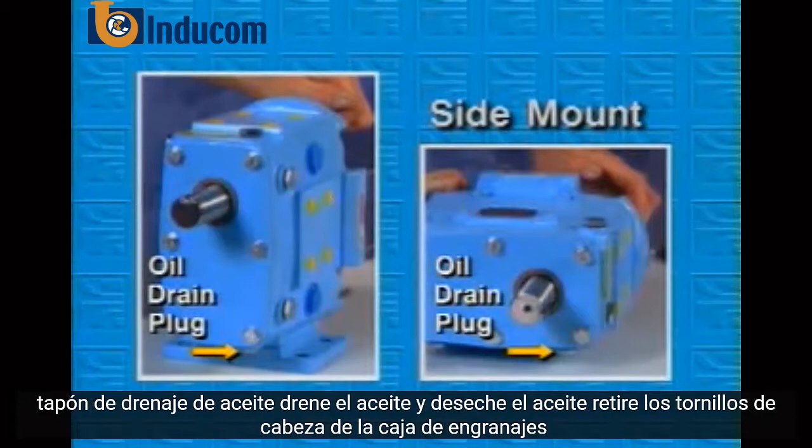The second portion of this video presentation will show the proper disassembly and reassembly procedures for the Gearcase components. Remove the oil drain plug, drain oil, and discard the oil. Remove cap screws from the Gearcase cover, then remove the cover. If the cover sticks, use a soft hammer to loosen it.

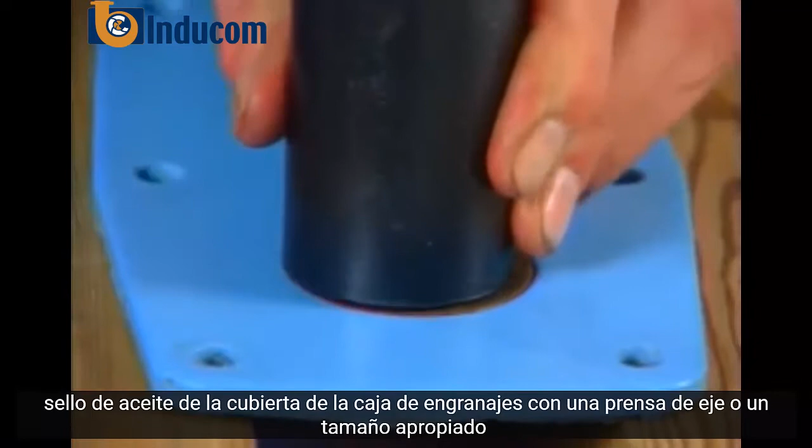Scrape the silicone sealant from the Gearcase and Gearcase cover. Remove the oil seal from the Gearcase cover with an arbor press or an appropriately sized tube and discard. Straighten the locking tabs on the lock washers. Prevent the shafts from turning by wedging a dowel or hardwood block in the rotors.

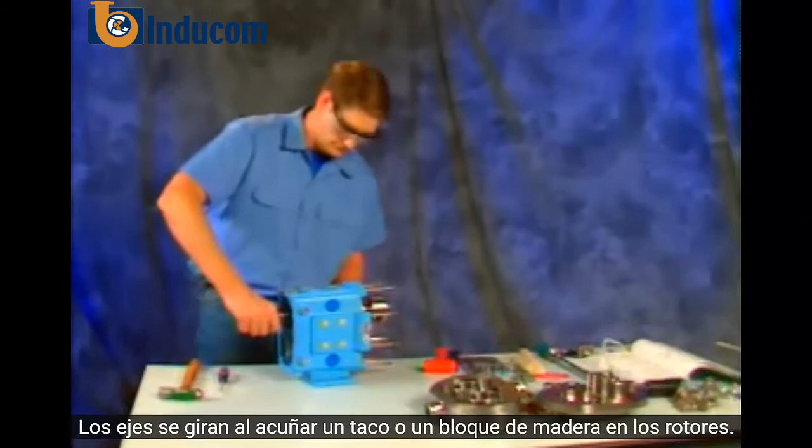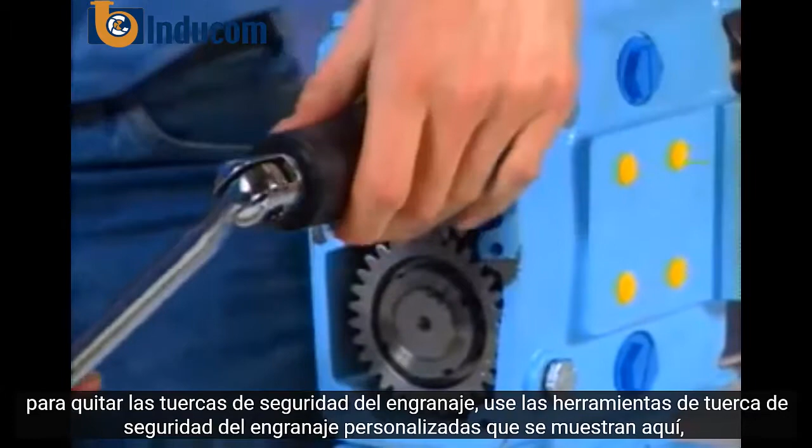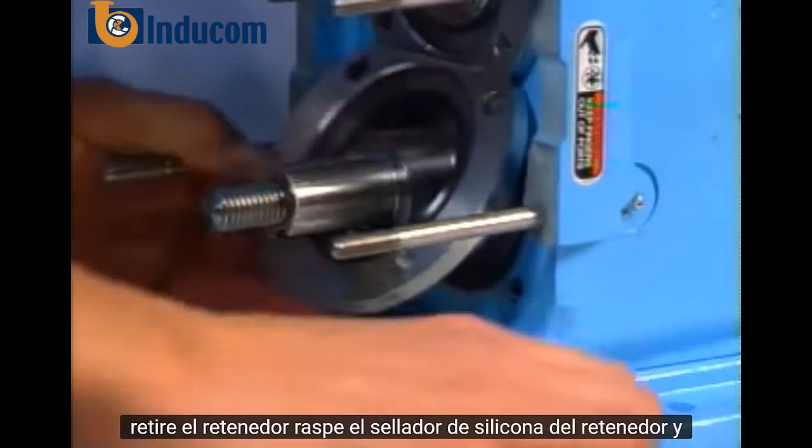To remove gear lock nuts, use the custom gear lock nut tool shown here, which is available through your distributor. You can also use a spanner wrench or drift. Gears will be removed later. Remove the front bearing retainer cap screws and pull off the retainer. Scrape the silicone sealant from the retainer and Gearcase.

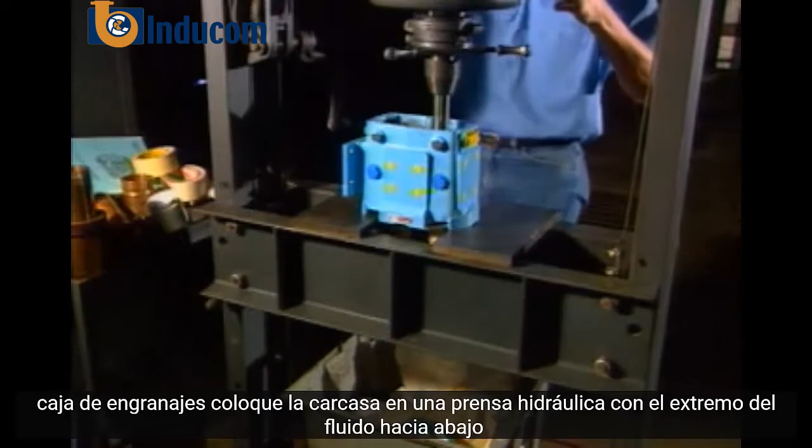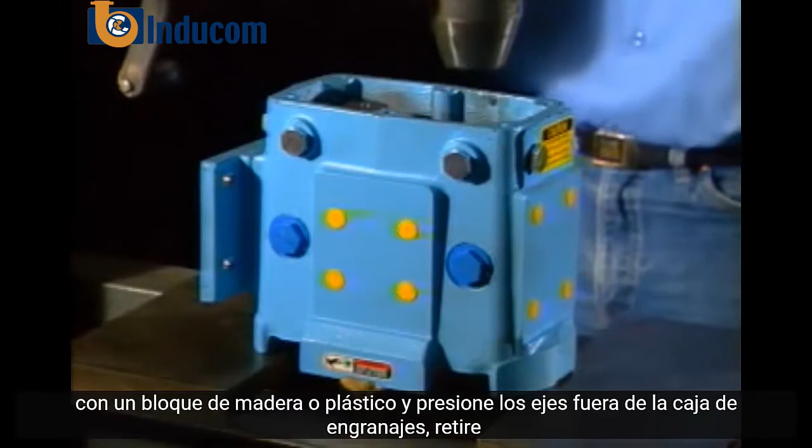Place the housing in a hydraulic press with the fluid end down. See Table 4 in the maintenance manual for tons required. Protect the shaft ends with a wood or plastic block and press the shafts out of the Gearcase. Remove the gear spacer and gear keys. Now remove the timing gears. Then press out and discard the grease seals from the bearing retainers.

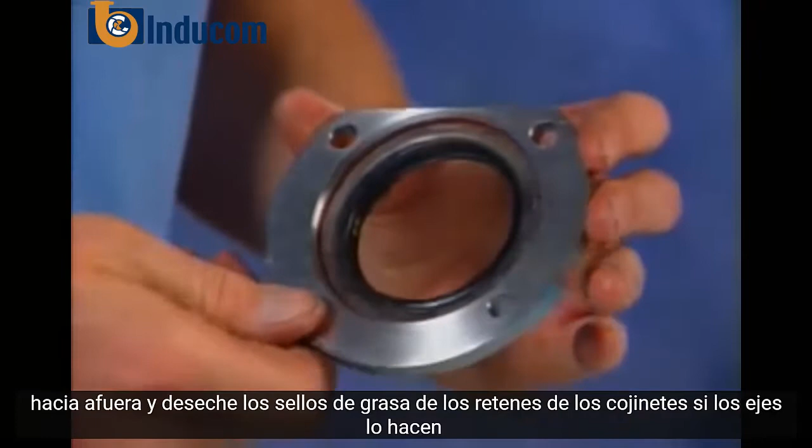If the shafts do not need to be replaced, label the shim stock according to the shaft it came from. Use drive shaft or short shaft on your label. This will eliminate recalculation of shim requirement. Press out and discard both of the rear oil seals in the Gearcase.

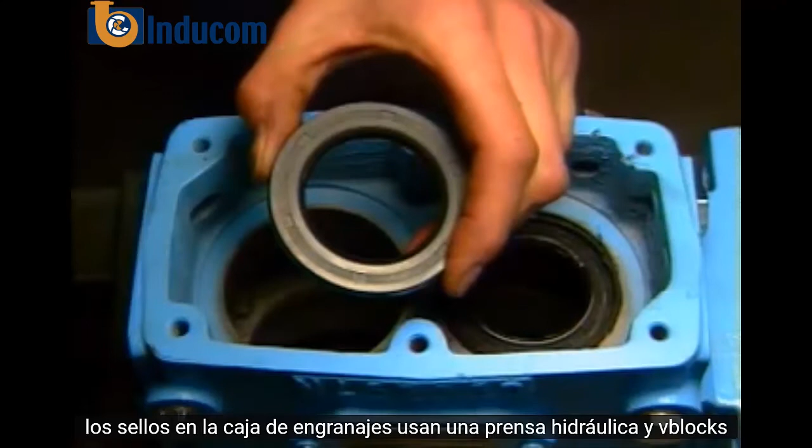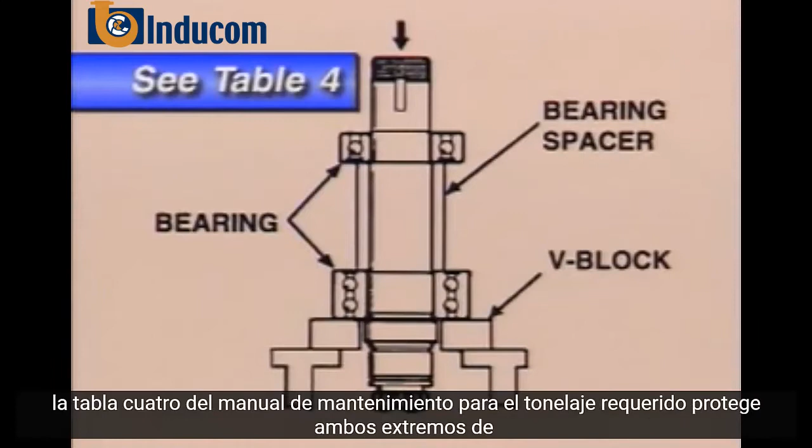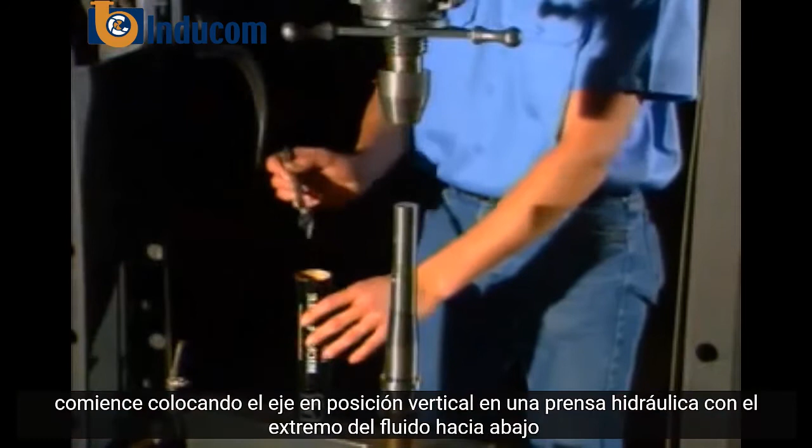Use a hydraulic press and V-blocks to remove the front and rear bearings and bearing spacers from the shafts. See Table 4 in the maintenance manual for tonnage required. Protect both ends of the shafts from damage. The procedure for assembling the front bearings is identical for both shafts. Begin by placing the shaft upright in a hydraulic press with the fluid end down. Coat the front bearing area of the shaft with Micro-Plate No. 555 grease.

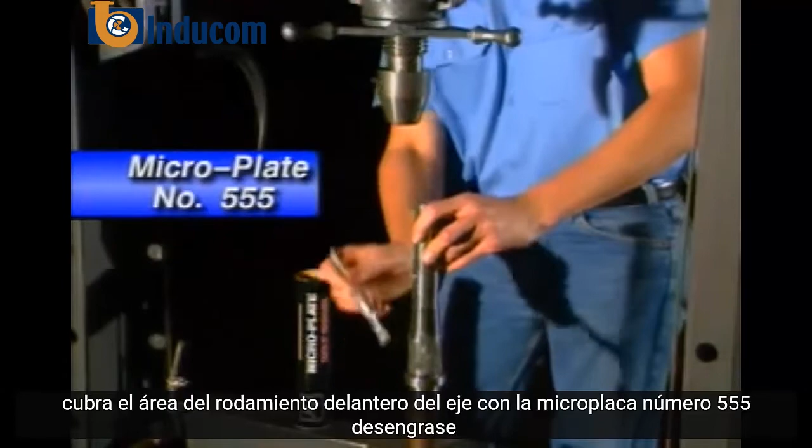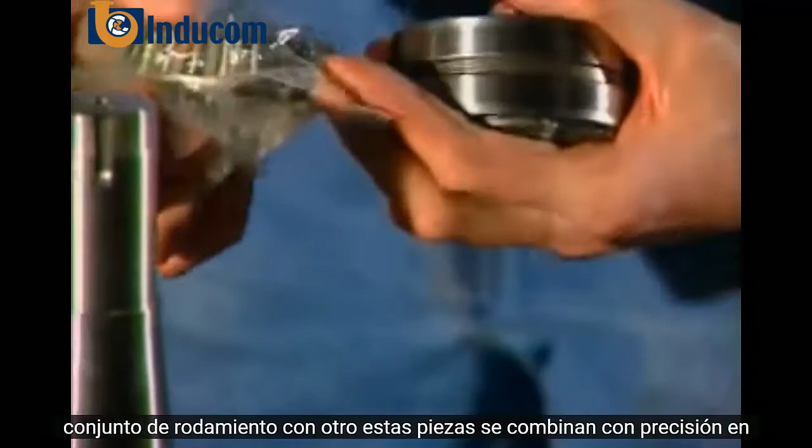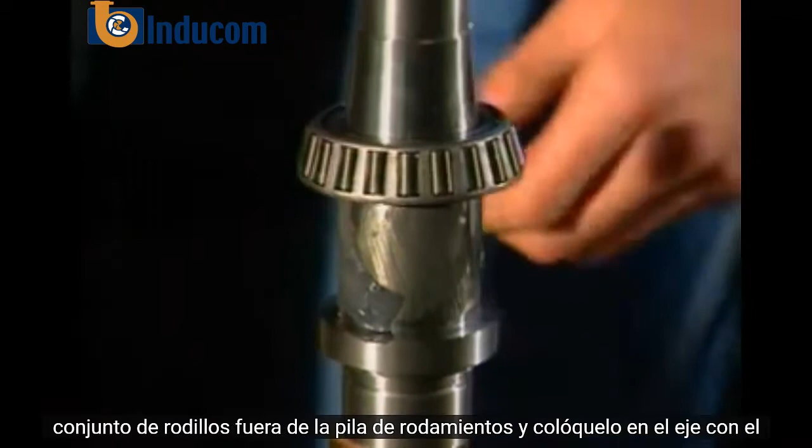Unwrap the front bearing assemblies. Take care not to interchange the parts of one bearing assembly with another. These parts are precisely matched in manufacture and must be installed as matched assemblies. Lift the cone and roller assembly out of the bearing stack and place it on the shaft with the radius down. In all cases, when pressing bearings onto the shaft, press only on the inner diameter or bearing race.

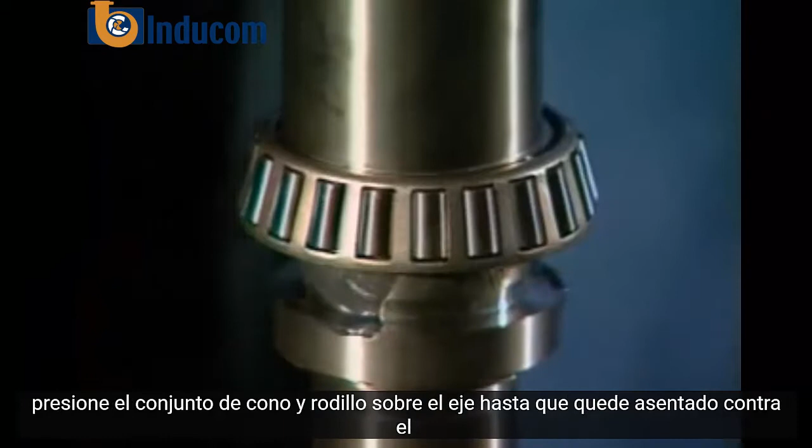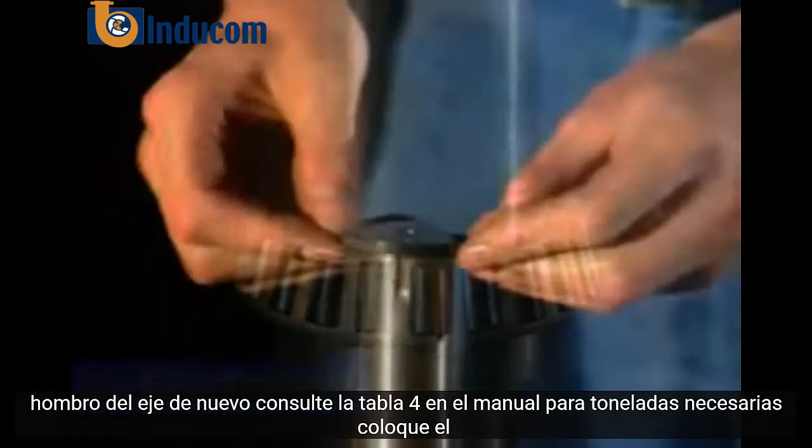Make sure you have the proper size driving tube. You may need several sizes for the different bearings. Press the cone and roller assembly onto the shaft until it is seated against the shaft shoulder. Again, refer to Table 4 in the manual for tons required. Place the front inner bearing spacer over the shaft onto the bearing cone.

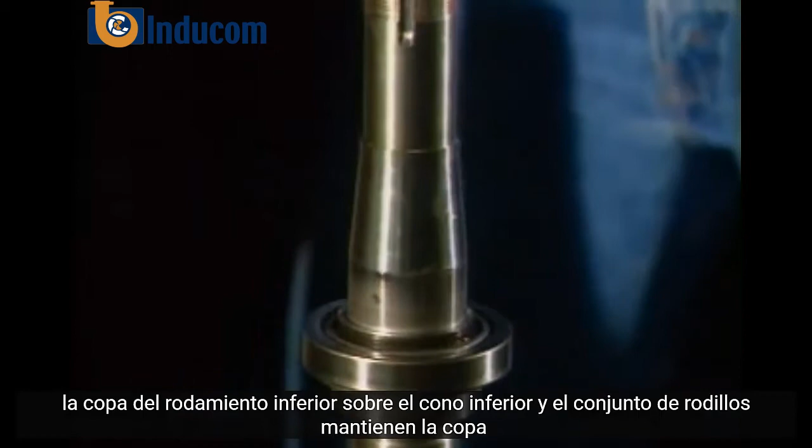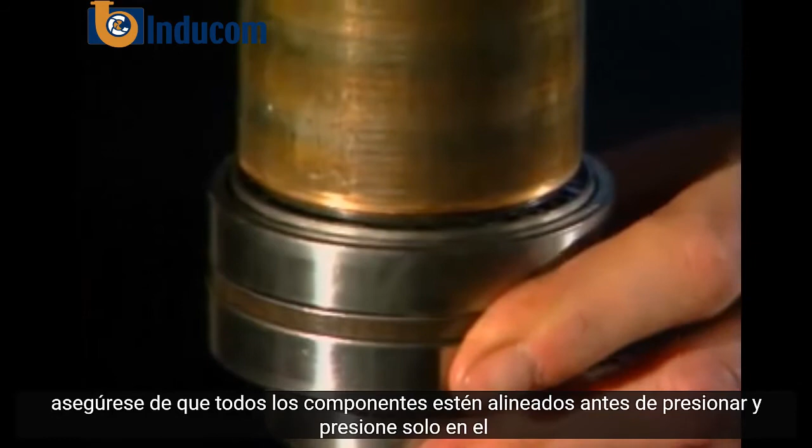Press onto the shaft and into the cup to complete assembly of the front bearing. Make sure all components are aligned before you press, and press only on the inner cone assembly. We've just assembled a 6-piece front bearing assembly. Some pump models utilize a 4-piece front bearing assembly, such as this. Install the bearing spacer.

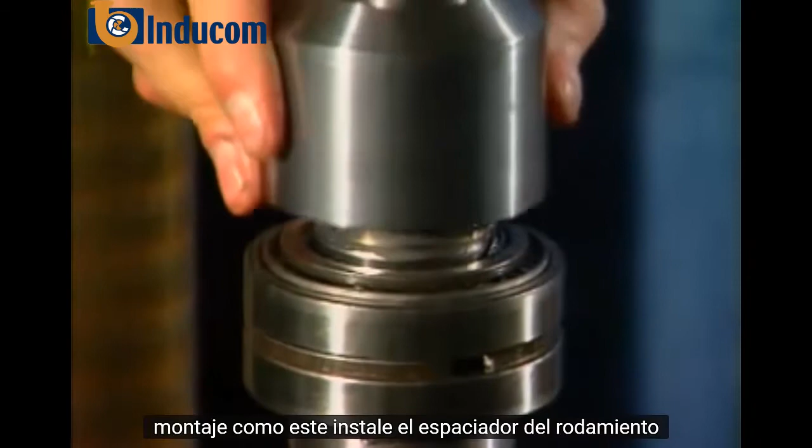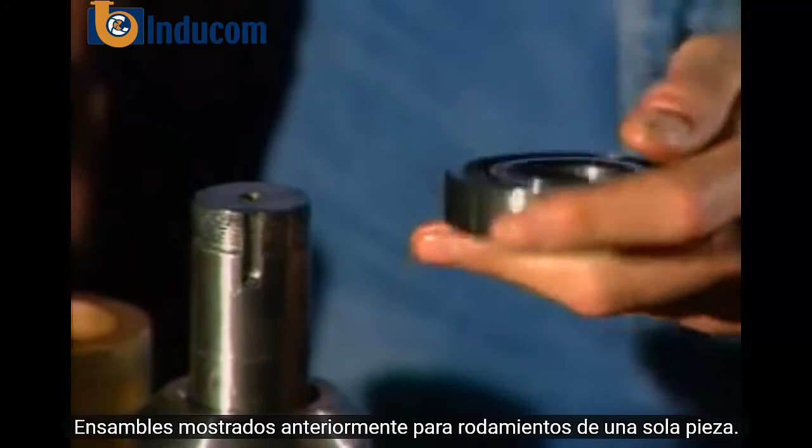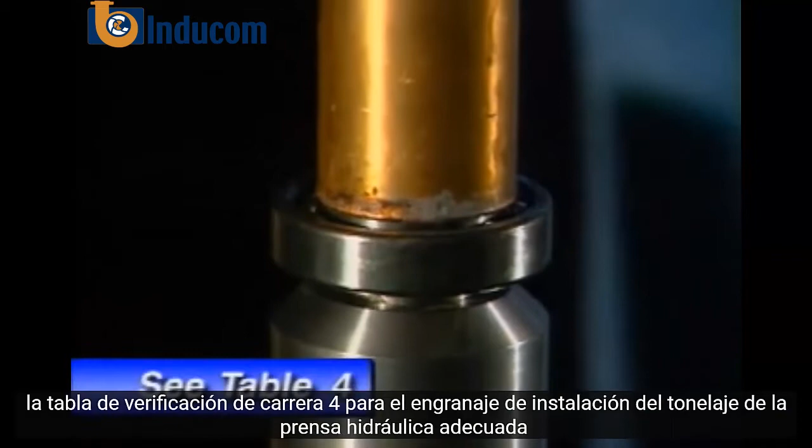Unwrap the rear bearing assembly. Some larger pump models have a multi-component tapered roller bearing assembly, similar to the front bearing assembly shown earlier. For single-piece bearings, the shielded side fits against the bearing spacer. Again, always press on the inner diameter or bearing race. Check Table 4 for the proper hydraulic press tonnage.

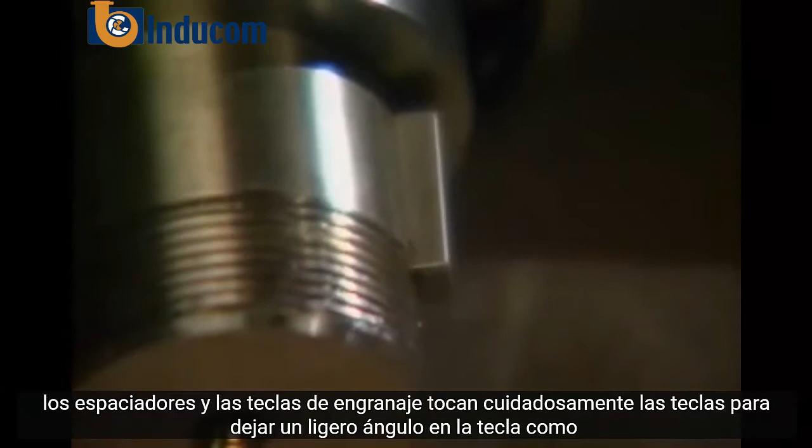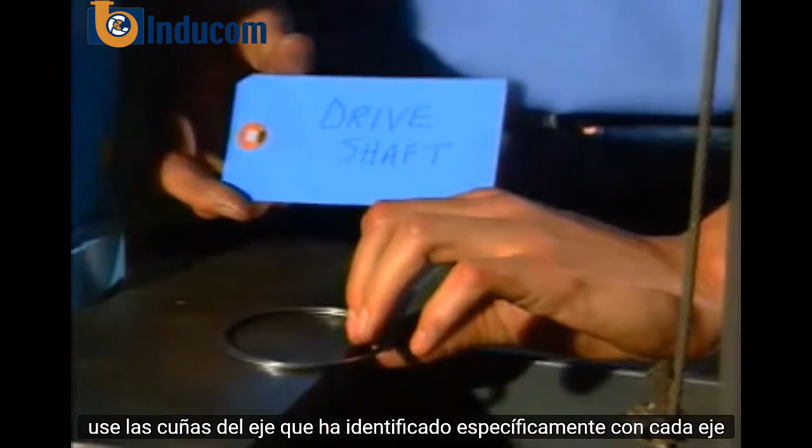Install gear spacers and gear keys. Carefully tap keys in. Leave a slight angle on the key, as shown, to aid in assembling the gear onto the shaft. The next step involves shimming, which, when done properly, assures the correct front face and back face clearances for trouble-free operation. Of course, if the shafts did not need to be replaced, the shims don't either. Use the shaft shims that you have identified specifically with each shaft. Just remember, same shafts, same shims.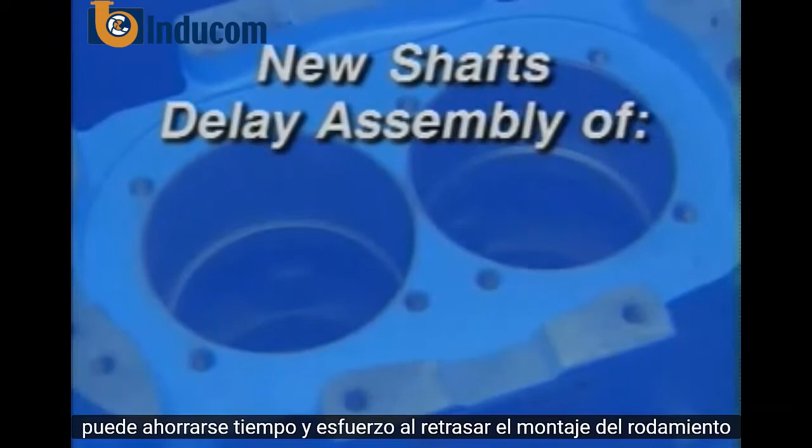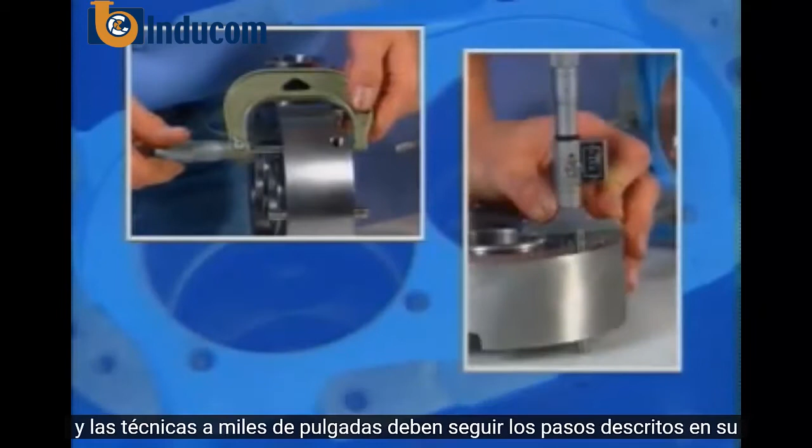If you're installing replacement shafts, you can save yourself time and effort by delaying the assembly of bearing retainers, gears, and lock nuts until you have verified correct shimming. You may need to remove shafts once to adjust shimming before you achieve the proper clearances. Those of you who are comfortable with precise measuring tools and techniques to thousandths of an inch should follow the steps outlined in your maintenance manual under shims, all models.

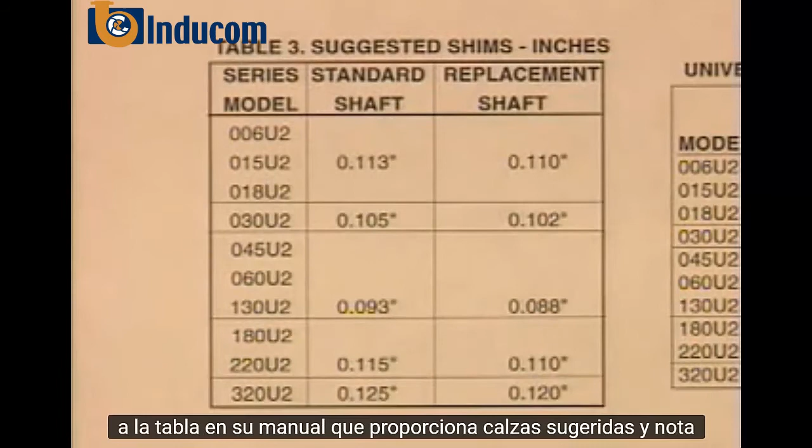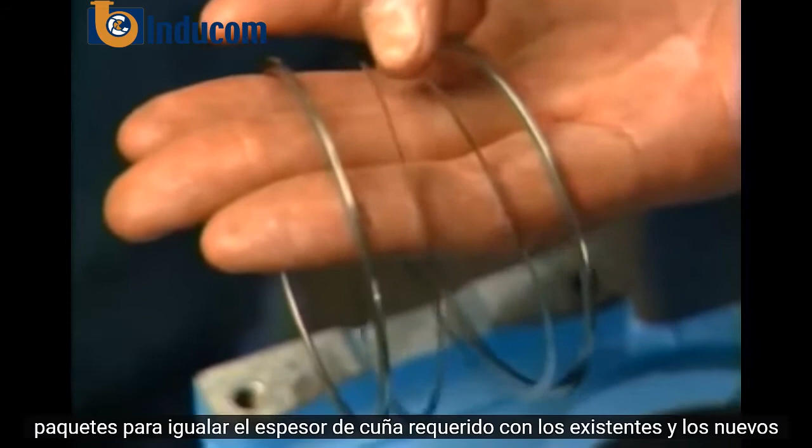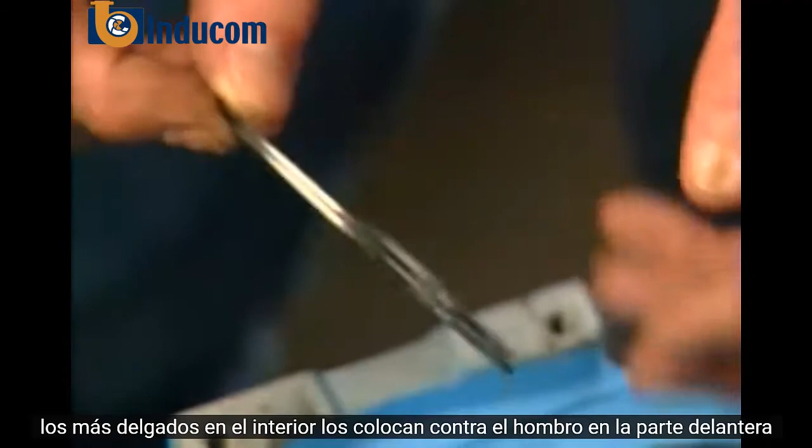For a more hands-on method, refer to the table in your manual that provides suggested shims, inches, and note the replacement shaft shim requirements for your pump model. Use standard shim packs to equal the required shim thickness. With both existing and new shim packs, arrange the shims so that the thicker ones are on the outside and the thinner ones on the inside. Place them against the shoulder in the front bearing bore.

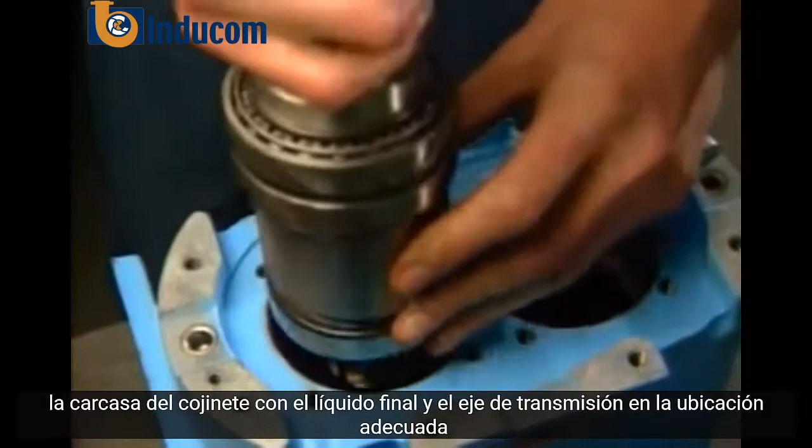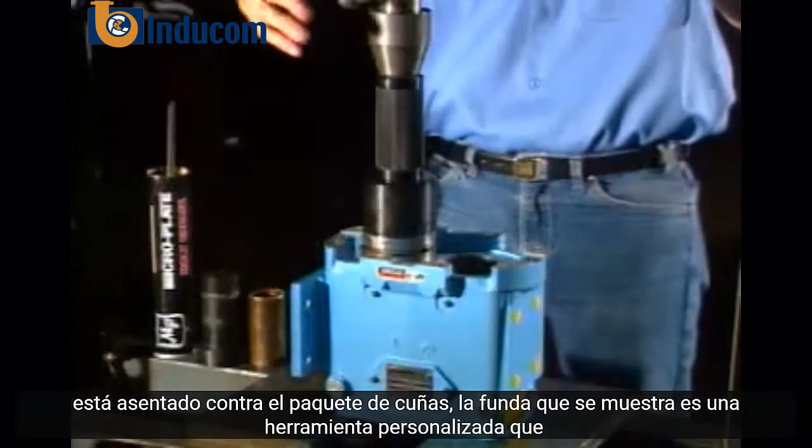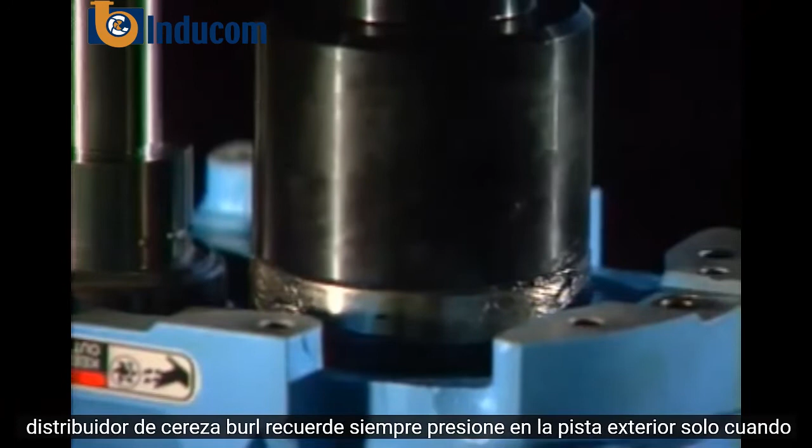With the proper shims in place, install the shaft assemblies in the bearing housing with the fluid end up and the drive shaft in proper location, top or bottom drive as required. Press the shaft into the housing until it's seated against the shim pack. The sleeve shown is a custom tool that presses against the outer race. You can obtain this tool from your Waukesha Cherry-Burrell distributor. Remember, always press on the outer race only when pressing a shaft and bearing assembly into the gear case.

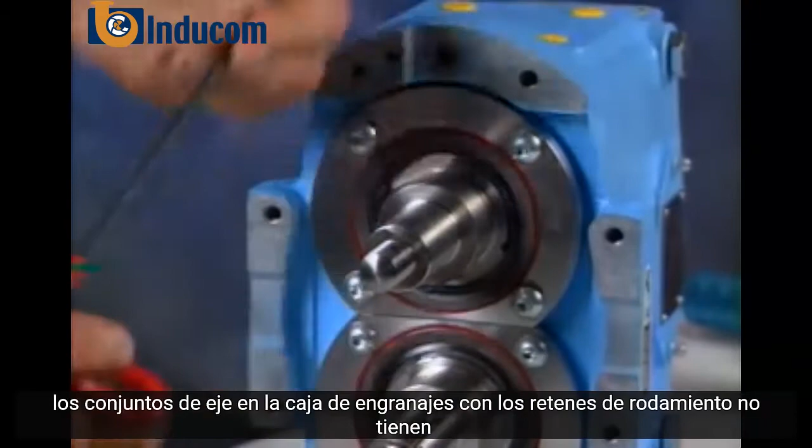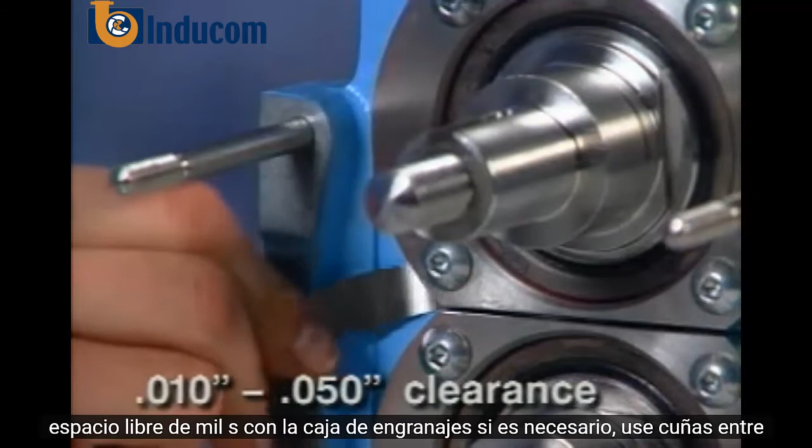Temporarily secure the shaft assemblies in the gear case with the bearing retainers. Add no silicone sealant at this time because we're just checking clearances. The retainer must seat firmly against the bearing and leave 10 thousandths to 50 thousandths clearance with the gear case. If necessary, use shims between the bearing and retainer.

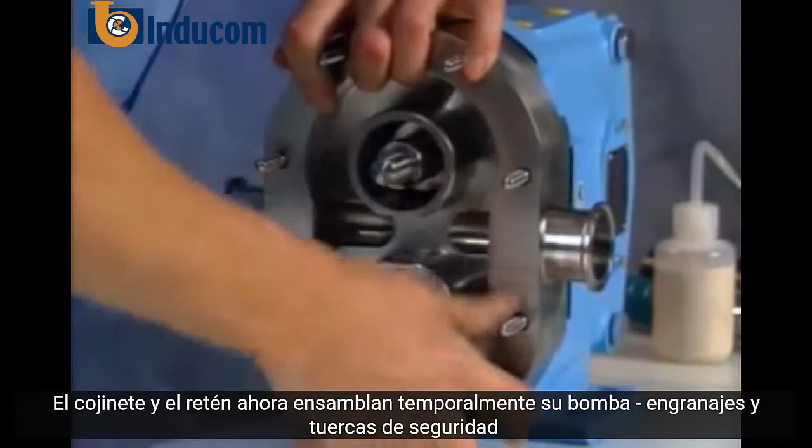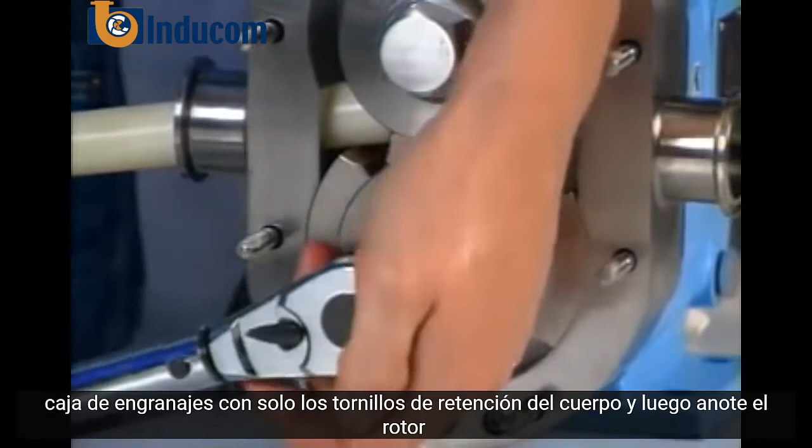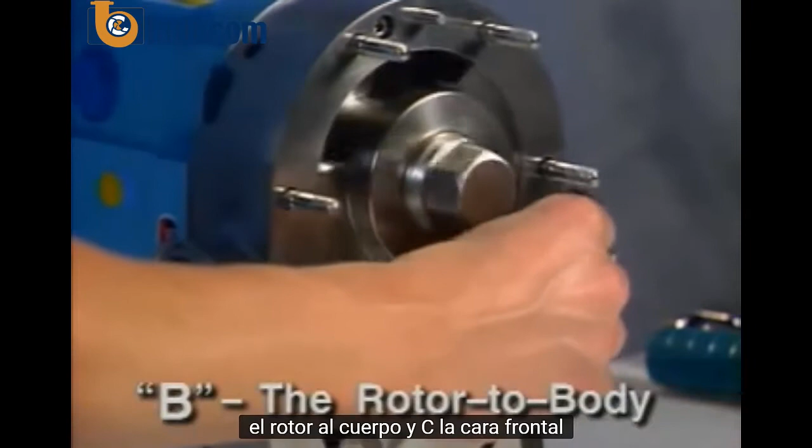Now, temporarily assemble your pump, minus gears and lock nuts. You can do this with the fluid end up or by securing the body tightly against the gear case with just the body retaining screws. Then, write down the rotor clearances for A, the back face, which can be measured from the front or the port. B, the rotor to body. And C, the front face.

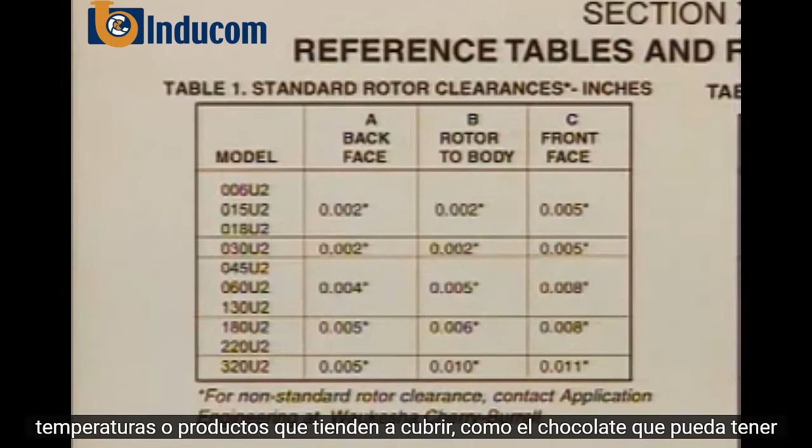Check these clearances against those listed for your pump model in Table 1 in your manual, Standard Rotor Clearances. If your pump application involves high temperatures or products that tend to coat, such as chocolate, you may have special clearance rotors. Contact the factory for proper B and C clearances.

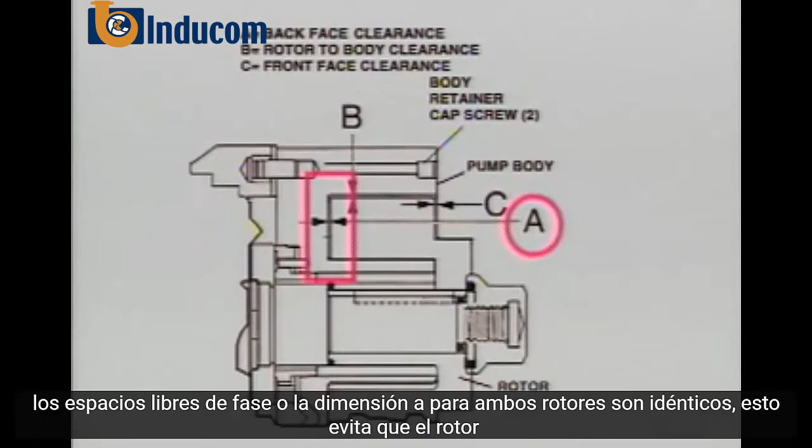You may not achieve the listed clearances the first time. Disassemble and adjust shim thickness to meet these back face clearances. Be sure your back face clearances, or dimension A, for both rotors are identical. This prevents rotor crossover contact.

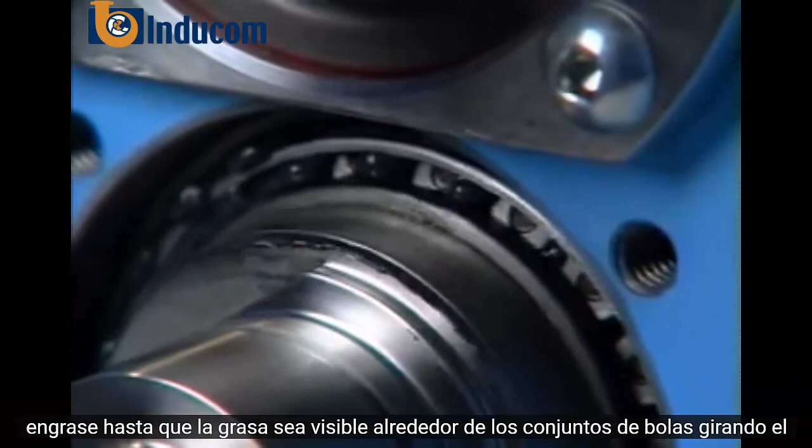After you've removed the fluid end from the gear case, remove the bearing retainers. Grease the front and rear bearings through the grease fittings until grease is visible around the ball assemblies. Rotating the shafts while you grease helps disperse the grease properly. Hand packing grease into the bearings also is acceptable.

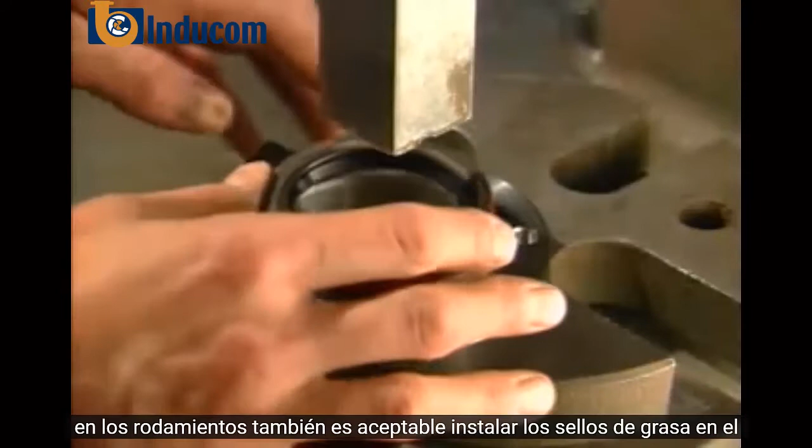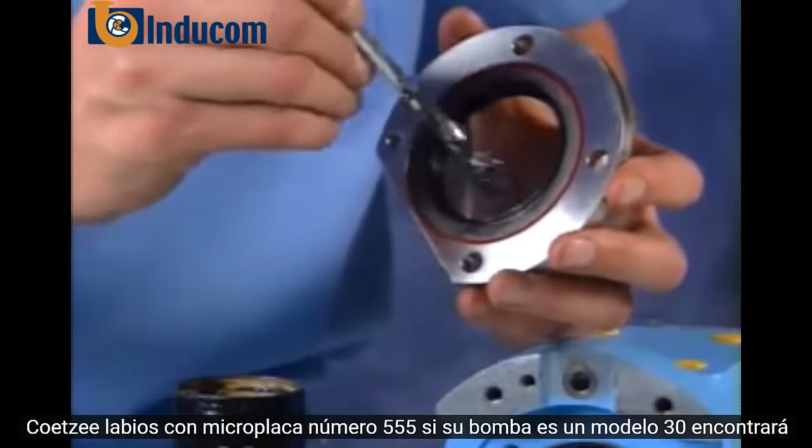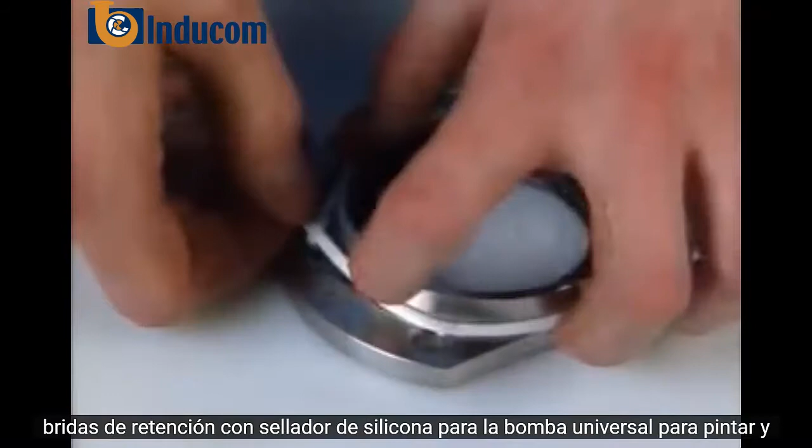Install the grease seals into the bearing retainers with the lip facing out. Coat seal lips with Microplate number 555. If your pump is a Model 30, you'll find the grease seal has to be pressed slightly farther. Coat the bearing retainer flanges with silicone sealant. For the Universal 2 paint pump and other silicone-free pumps, use Gore-Tex sealant. Then install the bearing retainers.

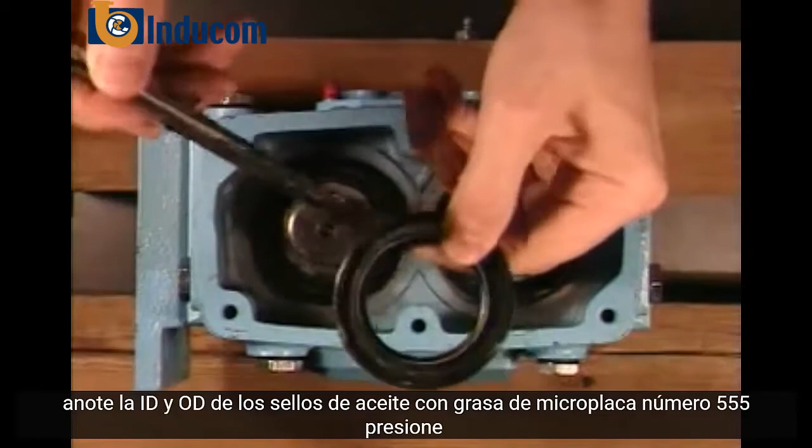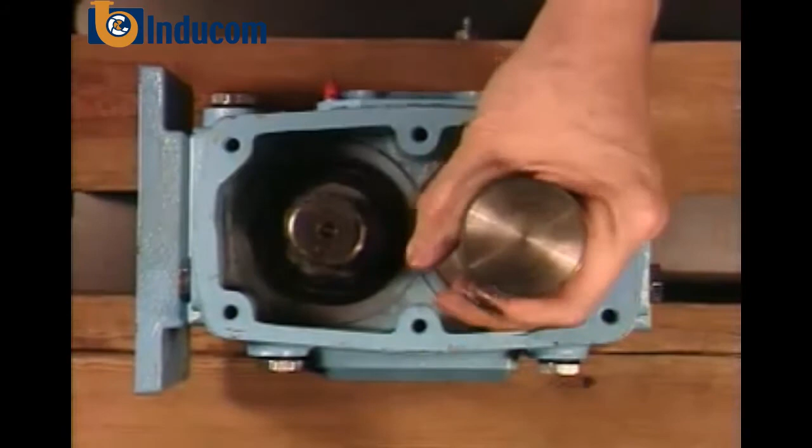Coat the ID and OD of the oil seals with Microplate grease number 555. Press in the oil seals with spring facing out. Before installing the timing gears, identify the gear with the single punch mark. It will be the drive gear. Now check the one with the 2 punch marks. When installed, the 2 punch marks will straddle the single mark.

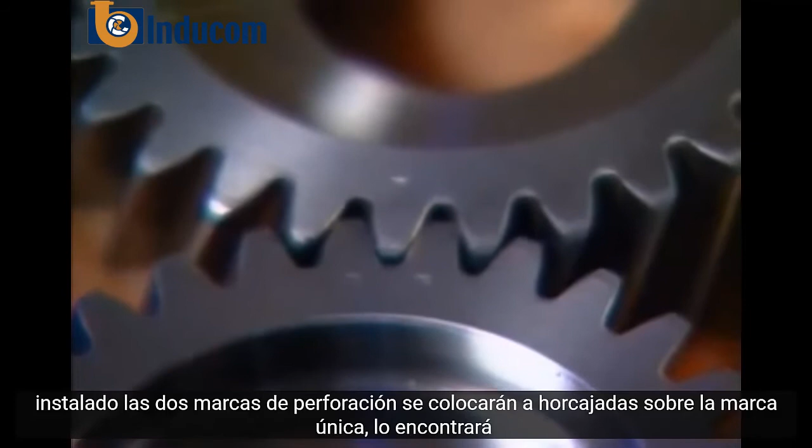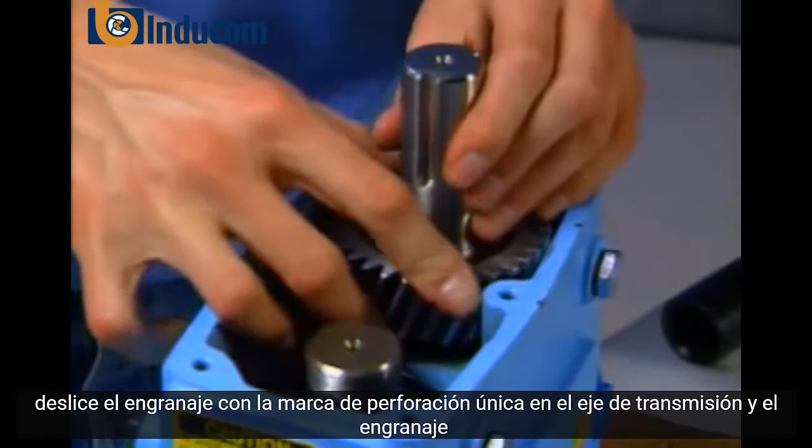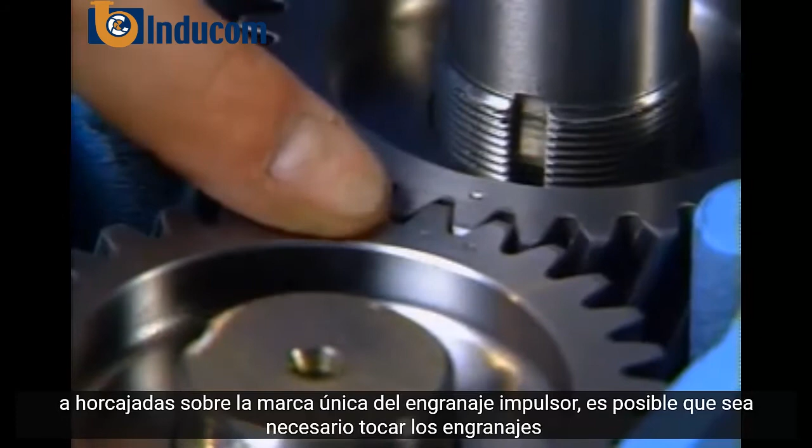You'll find it helps to put the rotors at right angles before aligning the timing marks. Then, slide the gear with the single punch mark onto the drive shaft and the gear with 2 punch marks onto the short shaft, again with the 2 punch marks straddling the single mark of the drive gear. The gears may need to be tapped into position. Slip on the lock washers and apply Microplate grease to the threaded area on the shafts and to the face of the lock nuts.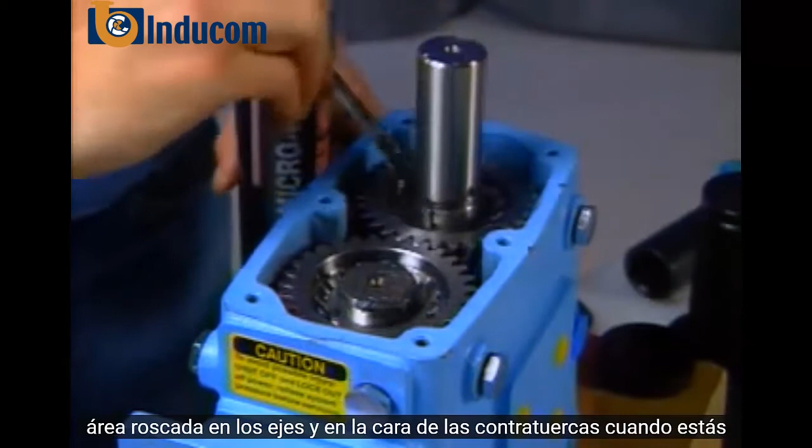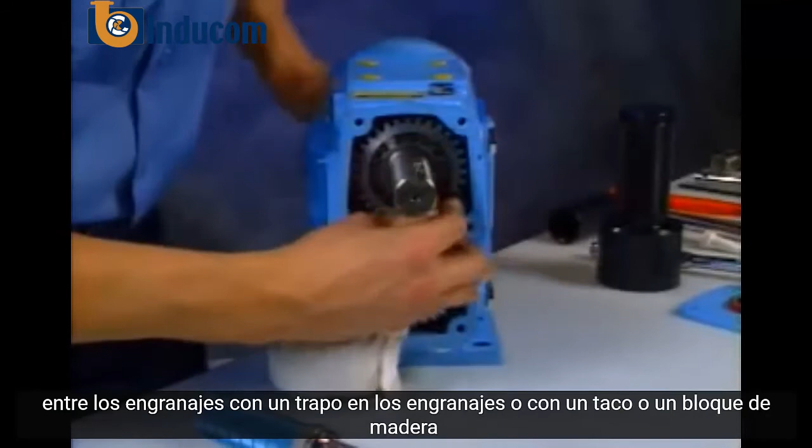When you're removing or torquing the lock nuts, you need to prevent the shaft from rotating, and here are 3 useful ways of doing it. With a wood or nylon block wedged between the gears, with a rag in the gears, or with a dowel or hardwood block in the rotors.

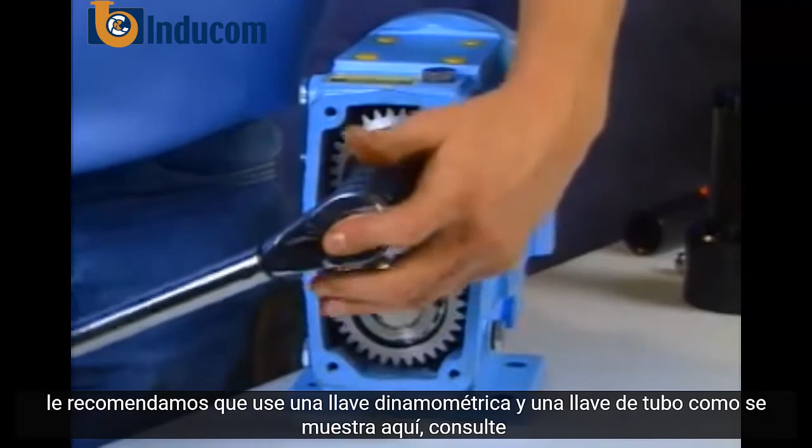You can tighten the lock nuts with a spanner, wrench, or drift, but we recommend you use a torque wrench and socket spanner as shown here. Refer to Table 2 for tightening torque. Bend the locking tabs to secure the lock nuts. This handy socket spanner is available from your Waukesha Cherry-Burrell distributor.

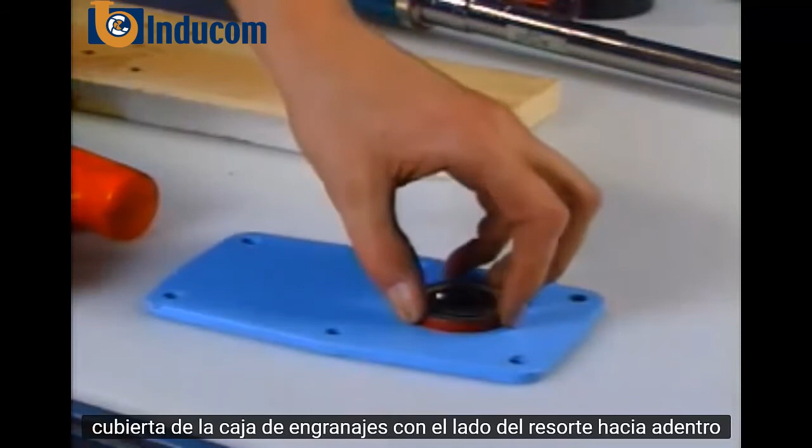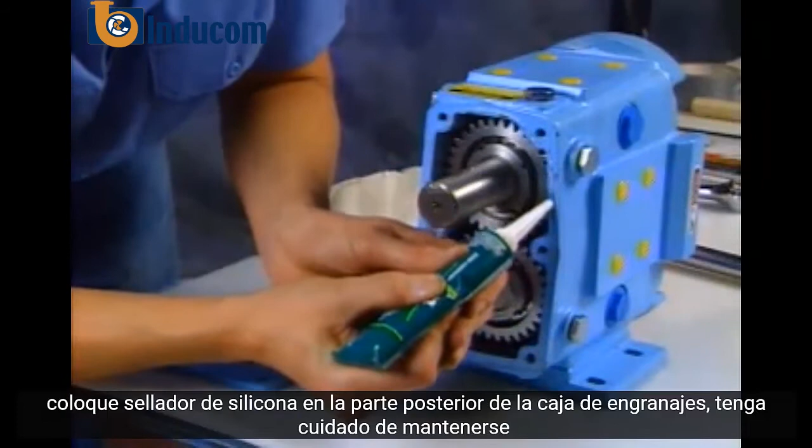Press a new grease seal into the gear case cover with the spring side facing in. Place silicone sealant on the back of the gear case. Be careful to stay to the inside of the bolt holes. For the Universal 2 paint pump and other silicone-free pumps, apply Gore-Tex on the back of the gear case, again staying inside the bolt holes.

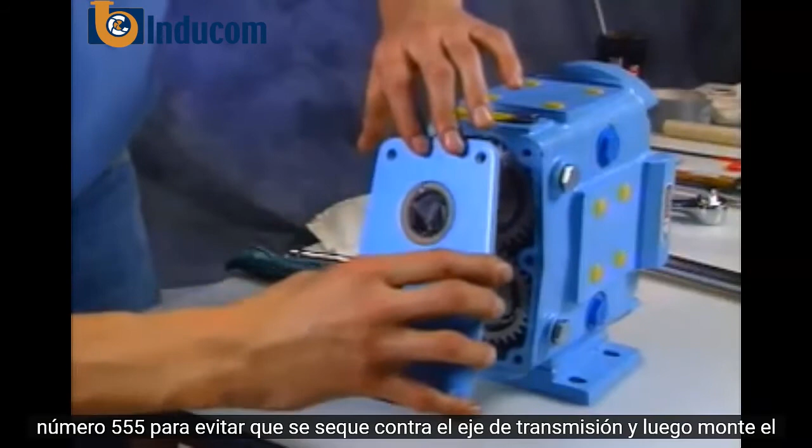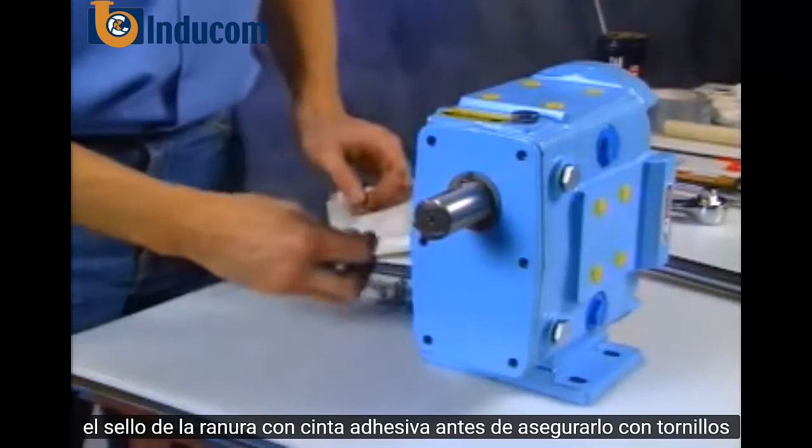Lubricate the gear cover's grease seal with Microplate number 555 to keep it from running dry against the drive shaft. Then mount the cover assembly over the shaft extension onto the gear case. Be careful to protect the seal from the keyway with tape. Before securing with cap screws, make sure the shaft is centered in the lip seal.

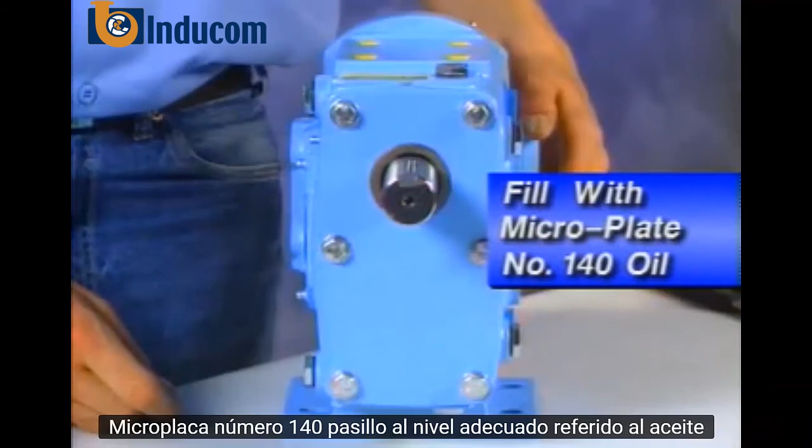Fill the gear cavity with Micro-Plate number 140 oil to the proper level. Refer to the oil capacity chart in the operation section of the manual. This is important because over-oiling is a common error. If your pump is side-mounted, it will require more oil in the gear cavity than horizontally ported pumps.

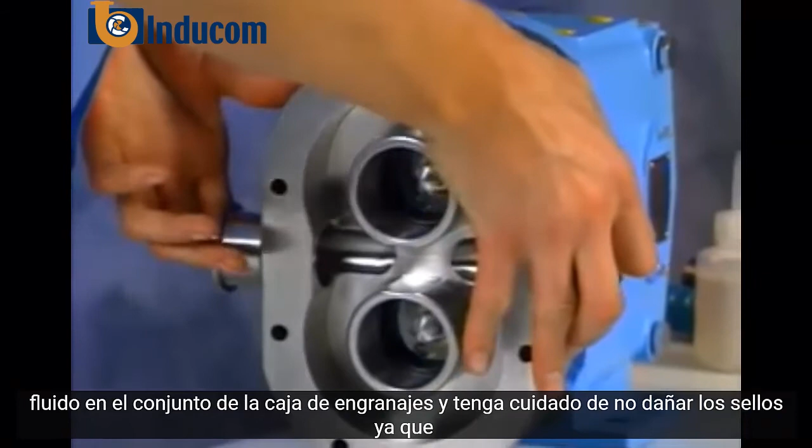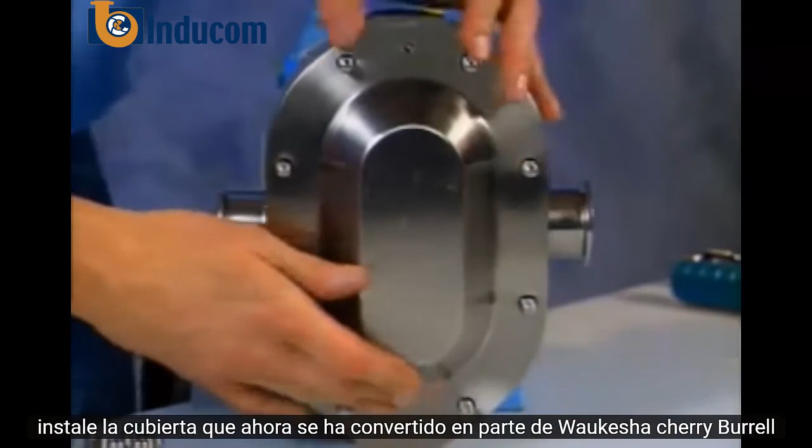Install the fluid end onto the gear case assembly and take care not to damage seals as the body is drawn over the shafts. Install rotors and rotor nut assemblies and install the cover. You have now become a part of the Waukesha Cherry-Burrell Pumps tradition. When you follow the procedures we've just covered, your Universal 2 Series pumps will provide long, trouble-free service.